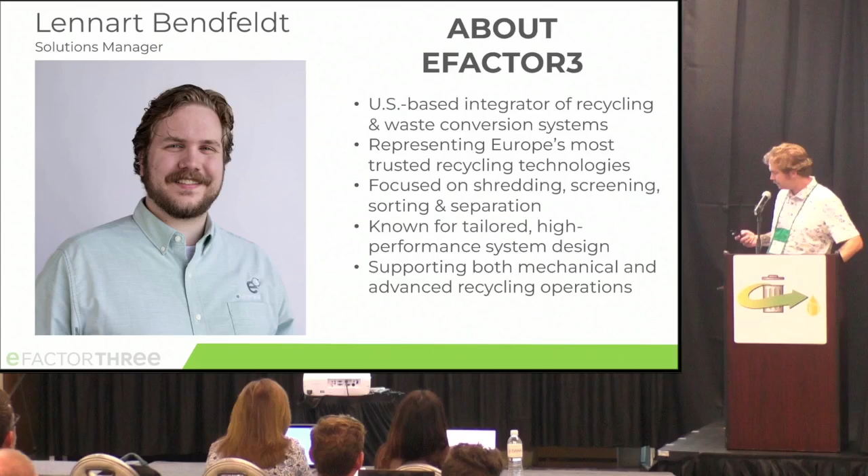But let's talk about the important thing, which is feedstock. As much as I believe people like Mike when they say their pyrolysis or gasification system can take any material - that's awesome, and I believe them - the question is not can your system handle this material in general. The question is, can it handle it economically? If you have a higher percentage of contamination, you're going to have higher levels of black carbon, higher levels of buildup in your system. You're going to have more problems disposing of that as well. In addition, you're also transporting more garbage that is not leading to a better yield before you even get into your system.

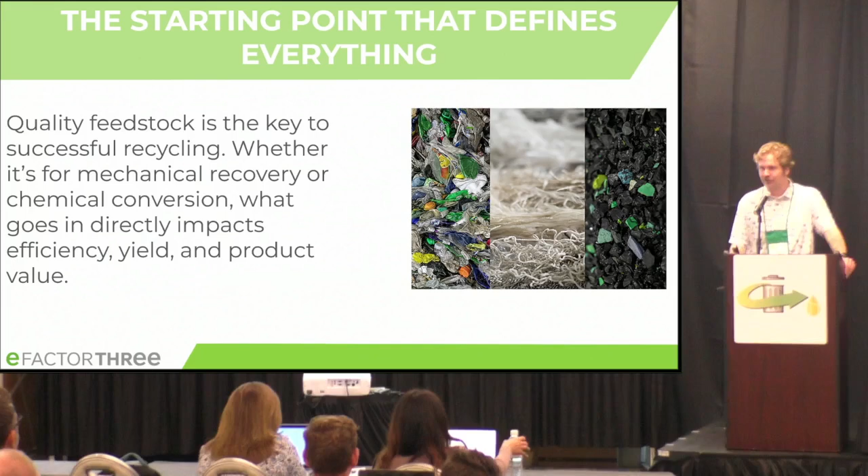So that's kind of what we focus on at eFactor 3. Incoming streams of trash - what are they? They're mixed, they're inconsistent, contaminated with all kinds of metals, films - sometimes those are desirable, sometimes they're not - and organics.

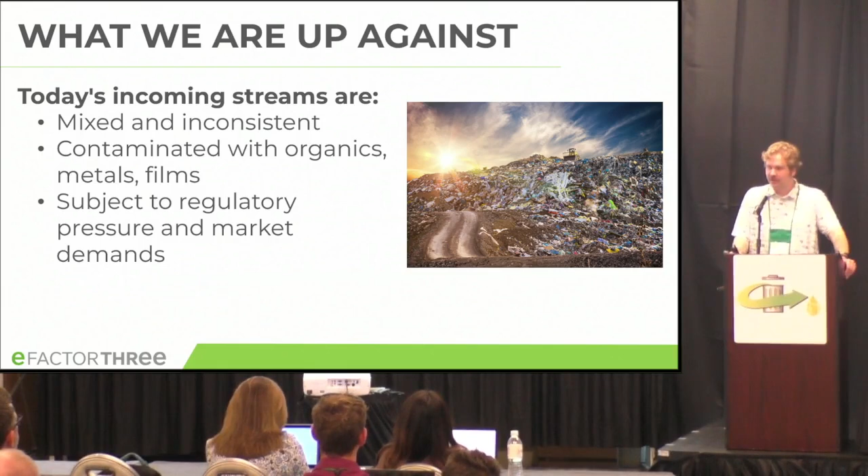As we know, there's advanced recycling and then mechanical recycling. Mechanical recycling requires high purity plastics. Sometimes we need to get into hot washing plastics, even with soap, which is not a fun process - that takes a lot of energy and a lot of commitment. Advanced recycling in a lot of ways gives us more flexibility to process those materials, as it can handle higher levels of contamination.

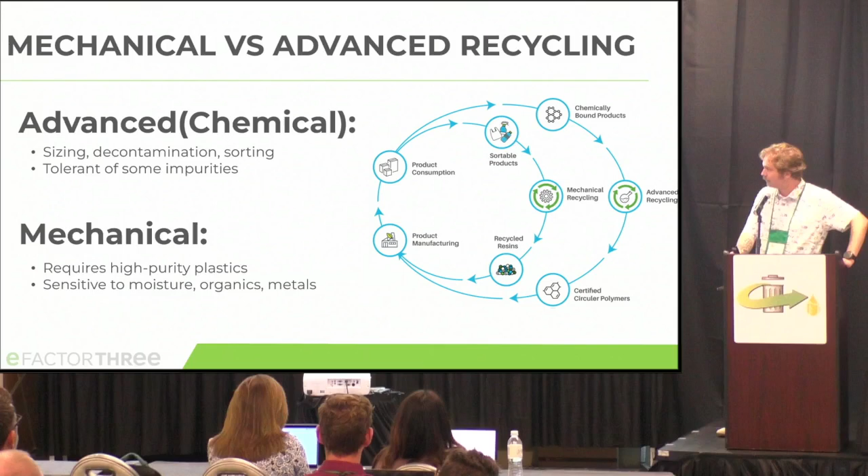What does something like that really look like at the end of the day? How can we take a dirty stream of material and, although we may be able to process it, how do we make that process more efficient by increasing the purity of our materials?

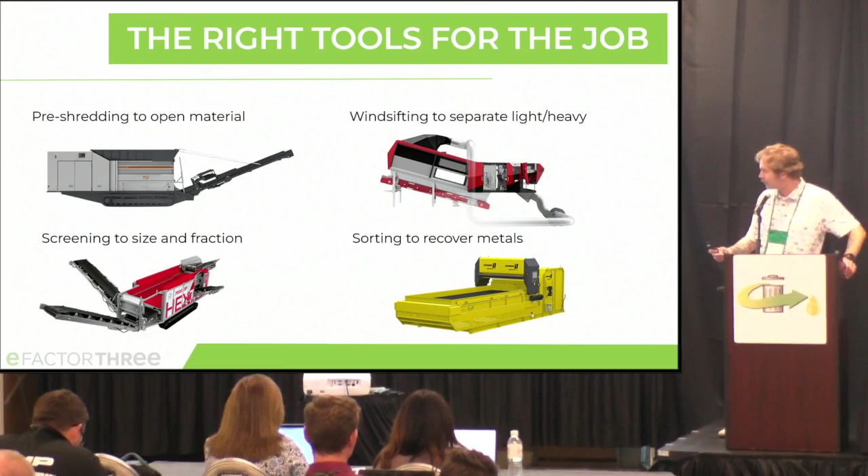First, downsizing that material is an important step to get it into a workable form. Then different levels or types of sortation - you can sort based on material, based on size, as well as density. Through types of machinery like wind sifting, disc screens, eddy currents, and optical sorters, you can start to sort those materials and get a more pure stream for your gasification or pyrolysis system.

I'm just going to go past this. Our primary shredders, where we're starting off at - these are generally the beginning of any recycling process that we see in the modern world. These are high volume pieces of equipment, especially as we talk about advanced recycling.

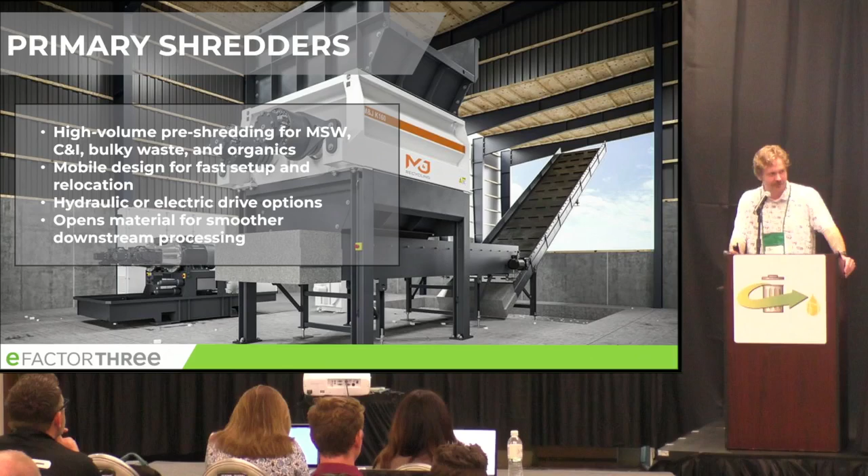A lot of our clients come to us and say they want to do 30 tons an hour of material - whether that's realistic or not is up to them, but we need to be able to fit that specification. One of our partners, M&J out of Denmark, produces high volume, heavy duty shredders where we can break down the incoming material regardless of what kind of contamination we have. If you've got metals in your stream or pieces of glass, those will wear down your machines very quickly. Just because the system can take the contamination doesn't mean the wear isn't going to be so high that you're replacing parts every 5 minutes anyway. When you're doing that, does it really offset the fact that you can take any kind of material?

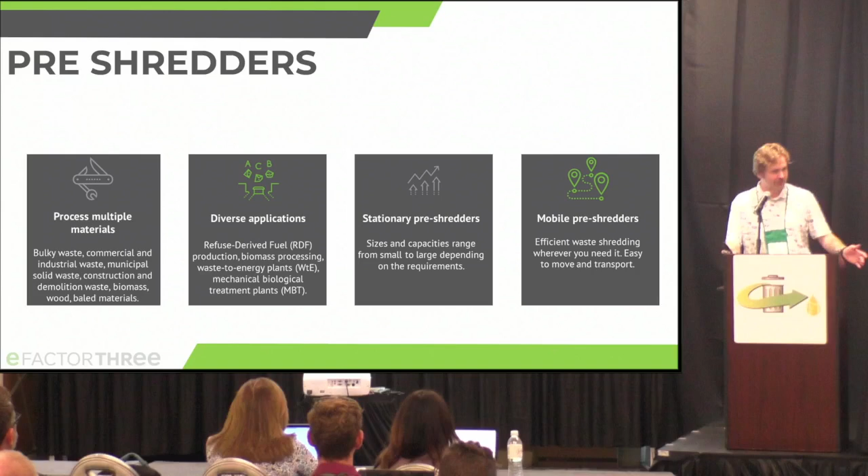With pre-shredders, you also have stationary shredders as well as mobile shredders. As Brian was talking about with decentralized pieces of equipment, that's also important in feedstock preparation. If you have to take plastic films from a MRF 50 miles away to a secondary processing facility, run it through that process, and then ship it again to a pyrolysis system or a gasifier, that just increases your cost. If you can move those pieces of equipment because they're mobile to a landfill or to a MRF, just like a decentralized piece of equipment, that already starts to cut down on a lot of that cost and make the process more flexible.

As we spoke about density separation, that would be with something like the AirStar from Westeria that can separate materials based on their density. It runs across an air knife, and anything light is going to fly further, anything heavy is going to fall out at the beginning.

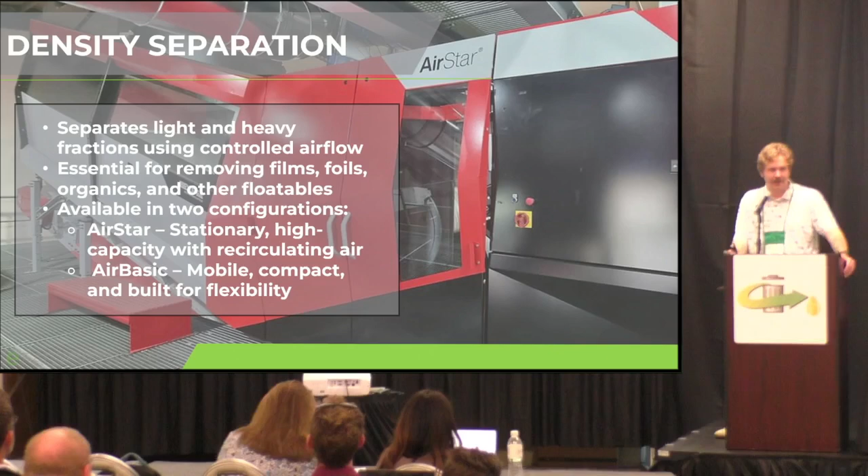And that allows us to get out some of the really bad stuff that nobody is going to benefit from - pieces of heavy metal, heavy rocks. Just because your system can handle it doesn't mean it's going to benefit your process in any way. This is a pretty simple way of getting it out that isn't highly technical. It just works on the density of your material.

It's something used very often in Europe, for example, in RDF production. You get MSW in, and then you separate the lights, the heavies, and the mediums, and you can get a very clean film fraction just in one step using something like a wind sifter.

This is another one of our partners, EcoStar, based out of Italy. They have a patented disc screening system called the Hextra or Hexact, depending on the material and model. They come in both stationary as well as mobile, and they're very well oriented to separating the organics from things like films, used very often in anaerobic digesters.

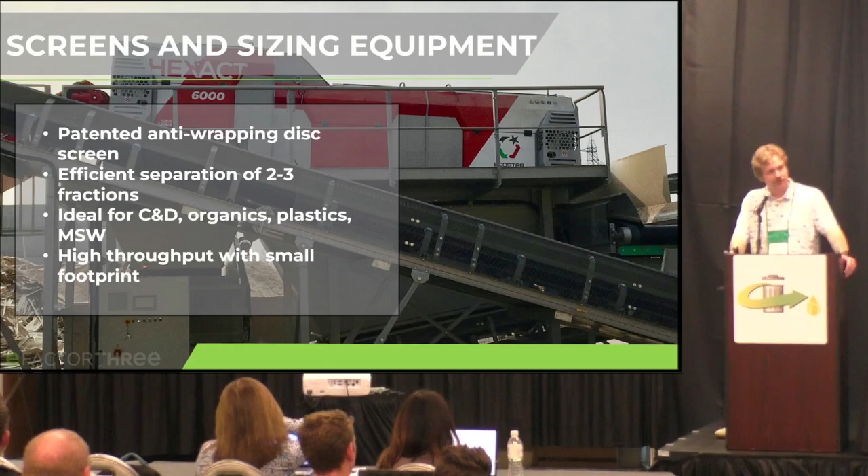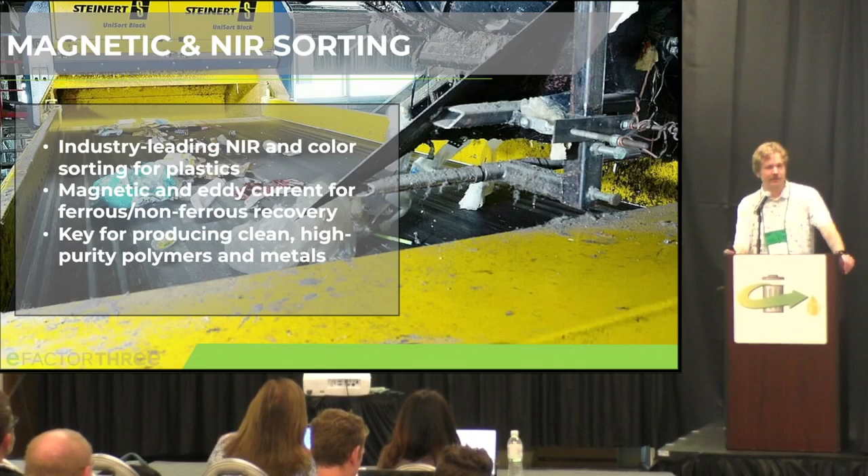And then when we talk about metals, again, that's a very common piece of contamination. Just because you can handle it doesn't mean it's ideal. A lot of these things like used beverage containers, pieces of aluminum, can be quite valuable on their own. It can make sense to install an eddy current or a magnet or something like that to get that out ahead of time and even sell that as a separate commodity.

And then, of course, comes the secondary size reduction. These are higher RPM, lower throughput shredders that can get materials down to an inch or two. They're more sensitive to things like metals, which is why we want to get everything out before that. But they create a homogeneous type of material that can then go into your pyrolysis system, into your gasification system.

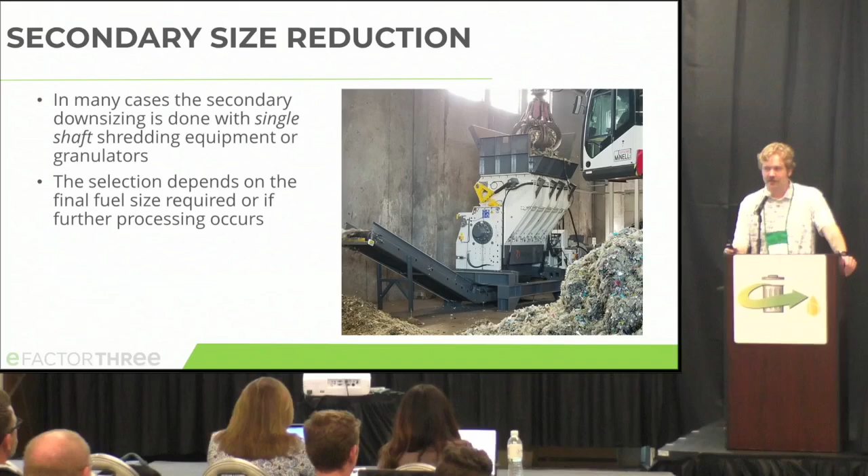Again, just because you could take in large varying pieces of material doesn't mean that making them more homogeneous at the end of the day wouldn't provide you with a more efficient process overall.

This goes a little bit into the mechanical recycling side of it, but one challenge you have with some of these materials is the contamination causes pretty horrible odors. I think most of us here have been in MRFs, in waste facilities. We like to joke about things like, oh, it smells like money, but it doesn't smell nice, does it?

So you can use things like infrared decontamination to not just clean the material and make it safe for food contact, but also to release the volatiles from that material and make a better smelling material that can then be sold on for injection molding or blow molding applications.

And when talking about mechanical versus chemical recycling, another big topic is washing versus not washing. How does your end product look and what kind of goals do you have? That's why I mentioned at the beginning how important it is to define your incoming stream and how it needs to look at the end.

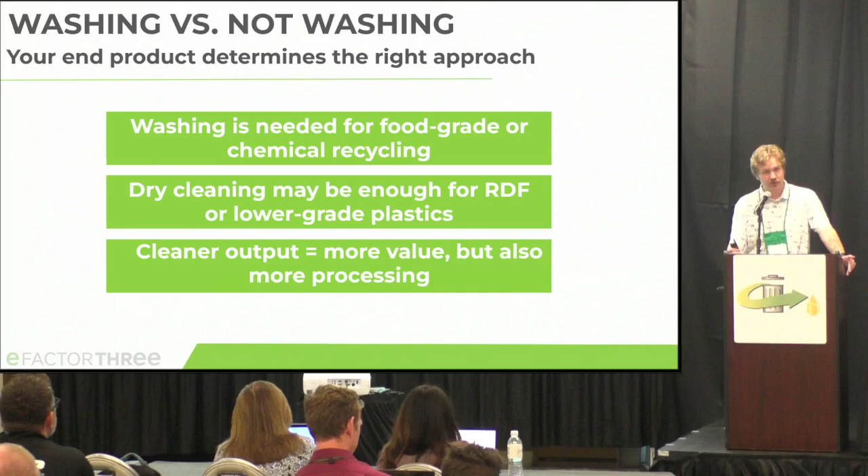If you have a more sensitive process, you may need to look into washing, whether that's a dry wash, a wet wash, or a wash that even includes soap in it. That is a critical question that we need to answer well ahead of time.

And this is just some of the different market segments that we work in that can be applicable to all sorts of pyrolysis and gasification processes, whether that's the wood waste that comes from C&D, agricultural plastics, as we'll be talking about later this week at the Ag Plastics Conference, or MSW residuals.

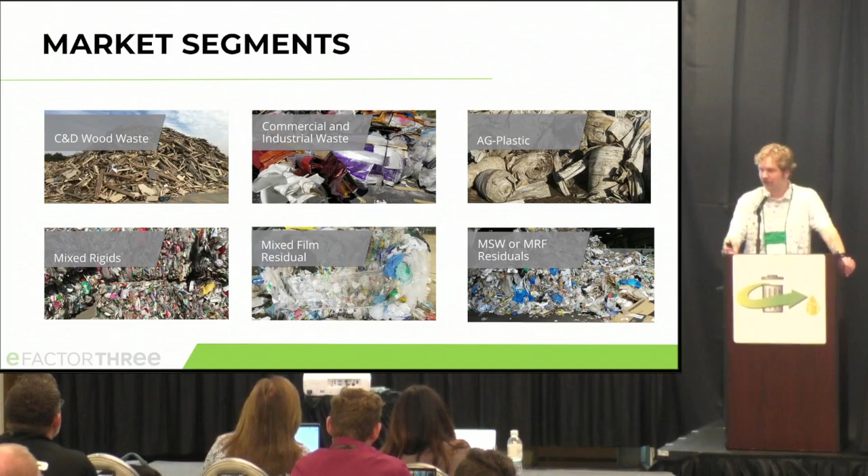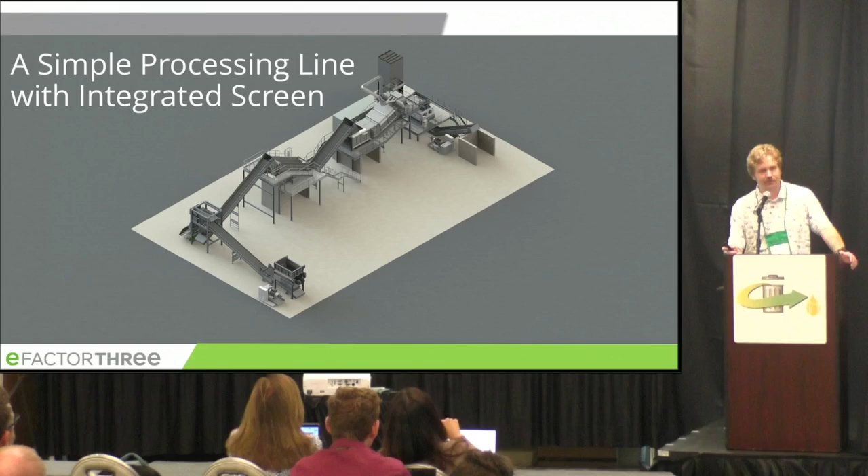Here's an example of a simple processing line: going from a shredder to a magnet to pull out any large pieces of metal, into a screen to sort that material by size, and then sorting based on density with the wind sifter. Once we've done that, we can do the final size reduction and create that more homogeneous RDF, or whatever feedstock you're looking for for your pyrolysis or gasification process.

In the next couple slides, I'm just going to show you a couple of examples of little flow charts that outline how you could get to your desired results depending on what the process looks like.

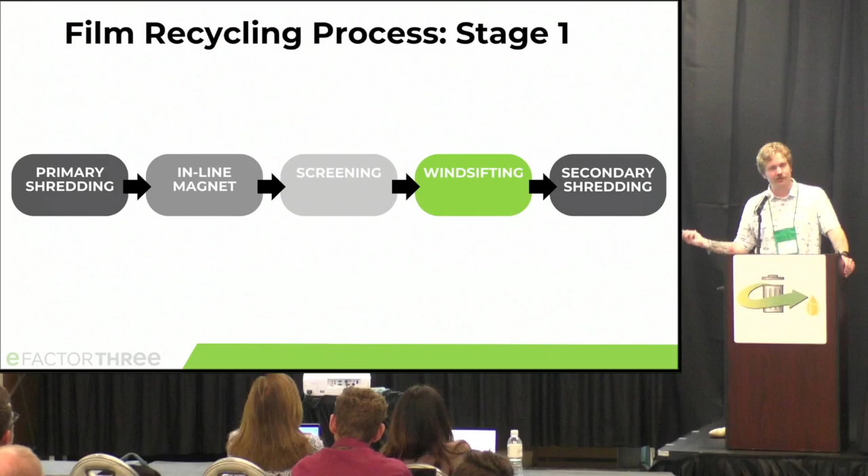In the film recycling world, again, we were going from primary shredding, magnet, screening, wind sifting, and secondary shredding. That's what you just saw on the last slide. Then depending on that end process, we can then go into different pieces of equipment. So if we really want a top quality mechanical recycling material, something that goes into blow molding, for example, we may have to go through a wet washing process.

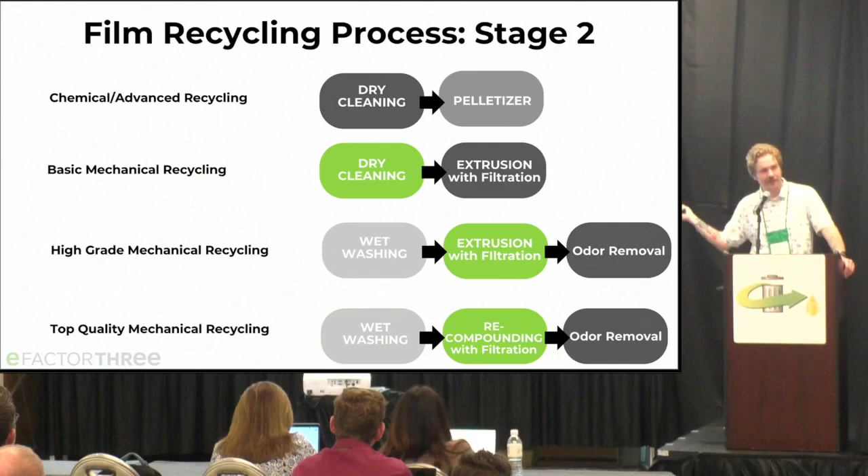If we're going to chemical or advanced recycling, sometimes dry cleaning or even no cleaning is required, just depending on how that in-feed looks.